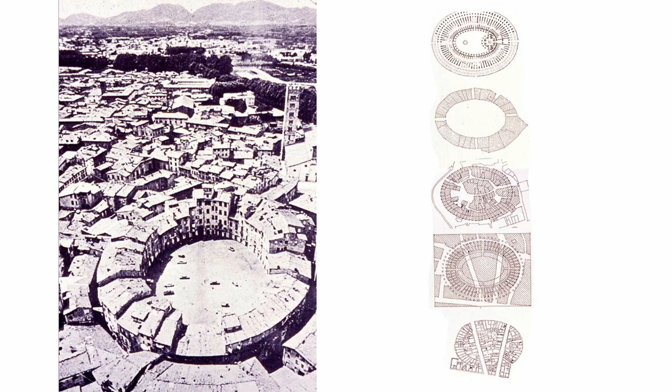But we've decided I wanted to call this building on the built. I guess that seems to resonate with the work that I set up the studio to do. As Balázs said, it was set up 25 years ago to focus specifically on altering existing buildings. My background is not architecture. I studied anthropology, and I found myself almost by accident in architecture, and I've always felt more comfortable working with existing buildings and changing them rather than starting with new buildings. And so it's that 25-year journey that we are on, and I'm going to show you a few projects that have marked the way along that.

I think the first thing I want to say is that if you think of buildings or villages or towns, they, to me, are more static than culture. The act of making them means that they are slow, they are expensive, and they are very intensive to build. And therefore, as a result of that, they're very massive, very heavy, very expensive to alter or remove. In contrast, if you think of culture as the beliefs or social norms or material traits of a group, culture is a living thing. Culture is restless. Culture constantly needs to be accommodated. It needs to find a space for its transaction, for its celebration, for its speculation.

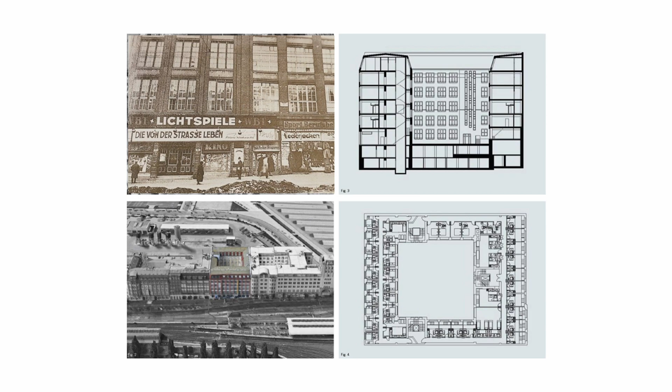It was built in the existing building. The building that we started with was built in 1921 as a cigarette factory.

This is a typology that, having had 2 hours in Budapest, I recognise will be very familiar to people in Hungary, but is quite alien to a London architect. It's a building typology which uses up the full width of the plot, building to the limits of the plot, and then creating courtyard spaces within the middle of it.

I always found it quite intriguing, because by building to the edge of the plot, it converts what you think of as only a front and back, where you get two sides of light, to one where you get six facades. So it's quite a beautiful discovery, the Hof, the courtyard building.

But this was the building that we were given. It had already been used as a hotel, and we were being asked to add new rooms to the upper levels of the existing hotel.

The character of the building was uninterrupted floor plates. Effectively it was a warehouse before, just single open floor plates. And to us, it felt like the form of it was rather like a kind of grand public house for the city.

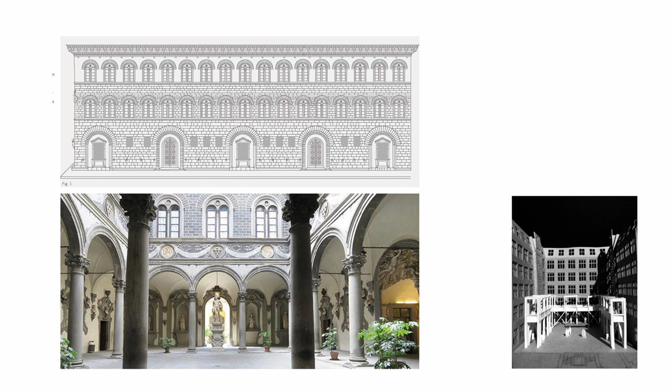When we're working with existing buildings, we find it very useful to think of what the building is trying to be, to understand what its prototype is. That helps us not worry about whether we like something or dislike something, which is a very unhelpful position to put yourself in. Liking is irrelevant, disliking is irrelevant. It's more interesting to try and understand something rather than decide whether you like it or dislike it.

If you think of the prototype of the grand public house in the city, it's a palazzo in Florence, a residence which contains both commercial and public functions. On the left is the Palazzo Medici Riccardi, a 15th century building in Florence. It is centered around a large courtyard, which acts as a kind of arrival space for anyone visiting that building. It acts as a focus to the whole building, and it's around that central space that all the rooms are arranged.

We felt that conceiving the idea of a hotel as a public palace might capture the sense in which the hotel has responsibility for the public life of Berlin. This is a little model we started to make of the courtyard as we were developing these early ideas for the project.

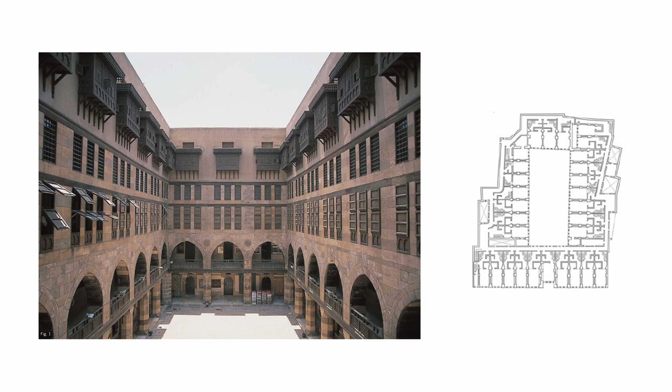Another reference for us, another prototype of this type of building, was the Wikala Caravanserai in Cairo, also built from the 1500s. This building was developed to accommodate visiting merchants to the city. It was a prototypical hotel, essentially arranged around an open courtyard, with accommodation for animals and storage at the ground levels, and rooms for guests as it went up higher.

We liked the almost theatrical quality of seeing through from one corner to another, seeing from one room to another, and being seen. The sense of voyeurism has quite a critical beauty in a courtyard building, and felt like it could be appropriate and interesting in a hotel context.

So, crashing from Cairo to Florence back to Berlin again, this is the actual building. We're out of the prototype and into the real building. You can see the large uninterrupted floor plan made possible by these rather beautiful curved beams that spanned from front to back, from side to side of the building.

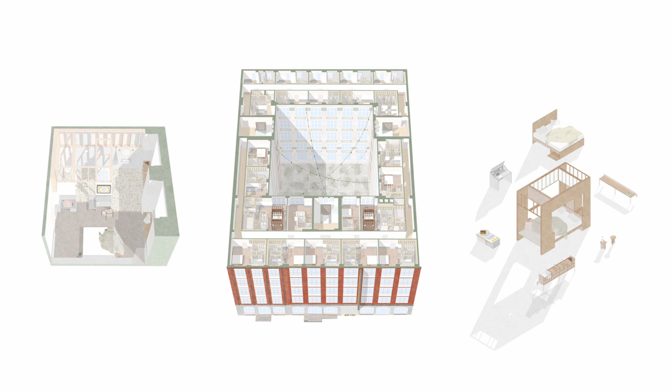So here are some drawings of the proposal. You can see we've started to divide the room up around that central courtyard, and we've started to occupy the courtyard with the activities that we think a public room should have. On the scale of the room, just about visible in this image, you'll see some proportions where we start to use the classic bottom, middle, and top.

In order to somehow allow this generous ceiling height to be occupied. And then at the top of those spaces, some perforated nature that allows your views through, or your apparent views through, so that you can still see the structure and the sense of open.

We make a lot of models in the studio, so these are 1 to 20, 1 to 25 cardboard and timber models, which allow us to test and develop the proposal. You can start to see in this proportioning system a language that maybe has come from that railway box, but perhaps feels industrial for the building.

Shutters and things like that mediate between the large windows and the room interior. So still making it as open plan as we could, maybe removing the conventional relationship between bedroom and bathroom that we have in a hotel to make the room as large as possible, but having screens and devices to subdivide it.

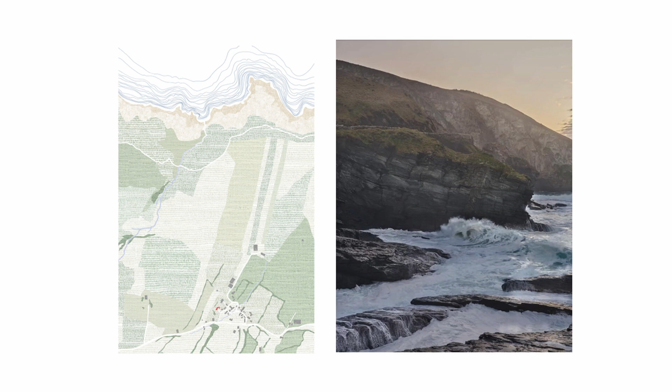So the next project I want to show you is a house in the west of England, in Cornwall, which is a district - it's the part of the UK that's furthest west. It's a kind of peninsula that goes out into the ocean. It gets the most amount of rain in the UK, and this landscape is the site for the building. The actual building is this little red dot here. That's the coast - the coastline is up here, so it's not on the coast, but it's very close to these quite dramatic cliffs and a dramatic coastline.

It gets very, very strong winds - all the trees are at one angle. This project is a restoration and an alteration of a house, a fisherman's house in that part of England.

But it was actually a project about trying to go backwards rather than go forwards. We often find that when a building comes to us, it's had lots of work done to it, which we are almost having to take away to find the building again. So with the first project there was nothing there, we started to build things, whereas this one we actually had to strip things away in order to find the original building.

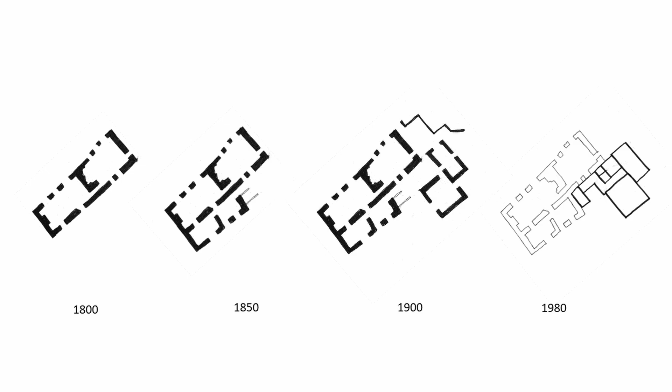So here is the evolution of the building over 200 years. It starts as a two-room building, very typical of buildings of this nature. Then it becomes a four-room building, then a four-room building with two outbuildings, and then those outbuildings all get meshed together, so it becomes a conglomerate.

I don't know if this is the case in Hungary, but it's certainly the case in the UK: old buildings don't have corridors. I think the corridor gets invented in the UK, about 1800 to 1850. It's not a good invention, I have to say, I'm not proud of it. But it gets invented in order for people to get from one room to another without interrupting a conversation. So it's the beginning of a sort of class system that arrives through the corridor.

And so you get this classical plan of room to room to room to room. The corridor arrives as a way to get from one room to another without interrupting the activities. And yeah, arguably it creates a whole lot more problems, because you end up getting rooms where no one goes. Anyway, that's a side effect. This building didn't have corridors, and many buildings of this age don't have corridors, so you can see you're walking from space to space to space like this.

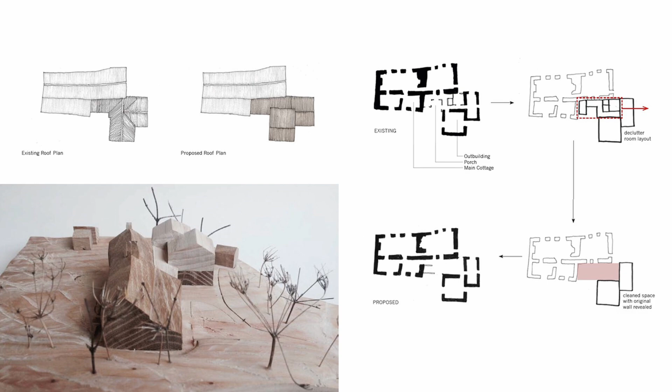I guess this is our sort of strategy for the proposal. We make more explicit the way in which the building has evolved, because that seemed to have just been concealed in modern plaster all over, so you didn't know what was old, you didn't know what was new — the whole thing was not legible.

So our proposal was to try and reconstruct this idea of the outbuildings and the house being separate structures, which had a... it's going to be interior, but it has a sense of a link between the old and the new. So we emphasize almost that you're passing from the original building to a new part. That was the strategy. And you can start to see in this model we start to suggest a different materiality between the old and the new, and in the proposals you'll see that a bit more.

This part of Cornwall has a very particular artistic tradition that emerges in the beginning of the 20th century. It's on the north coast of Cornwall, and it becomes a kind of artist enclave from about 1920, 1930. People escaping the city, looking for inspiration in the landscape — in the 1920s and 30s, Ben Nicholson, Alfred Wallis, a group of British modernists end up in this very remote part of Cornwall.

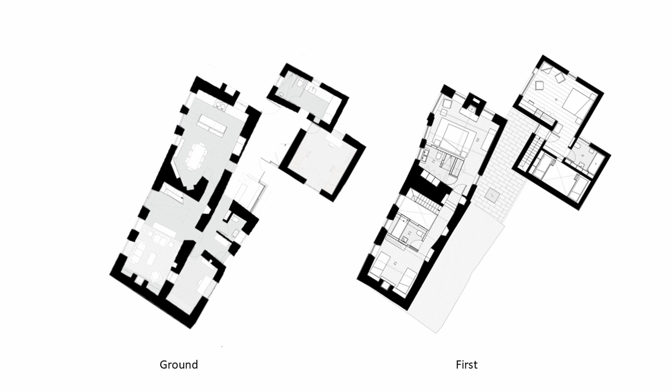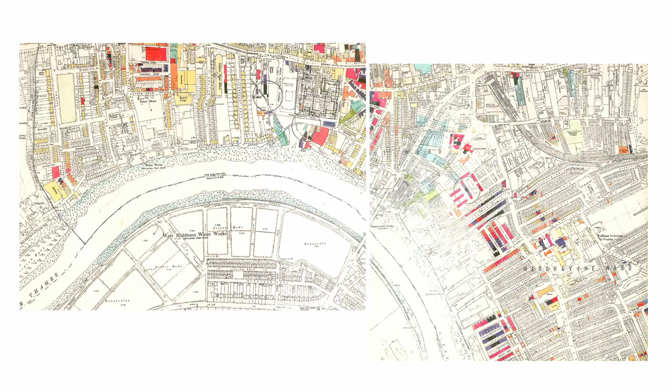There's a strange irony, maybe for all of us, that despite the intentions of our profession to change our cities, the biggest period of master planning in London, maybe in Budapest also, was by the Second World War—not by architects at all, but by a kind of imposition of bombing around the city. London's particular character of having social housing in spaces you'd never expect hasn't come through our own master planning, but through external master planning. It produces a beautiful character to the city, because it never becomes ghettoized, since it was randomly selected like that.

During the war, these extraordinary maps were made of London showing the destruction, each with a date of when something landed. The little black dots on the houses mark total destruction. Purple is where it was damaged beyond repair, like these ones here. Red is where it was seriously damaged but probably could be repaired. Orange is minor damage. We've got these atlases in our studio, and whenever you go to a site beforehand, it's a really interesting journey—you almost know what you're going to see just from the street, through this bombing map of the 5 years of the war in London.

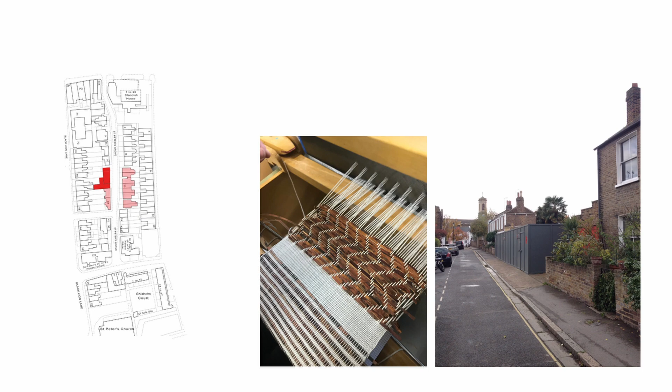So that's our site. That is literally the site from one end, from the garage of our neighbour to the next house. You could imagine 3 houses would have sat in that space.

I don't know why I put that picture of weaving in there. I can't remember, but anyway, it's a nice picture of weaving.

I suppose what I was talking about is this idea of rhythm in a way. It's like you need the bass, and then you need a kind of tune over the top of it. The tune can change as long as there's a rhythm that goes with it. That's something we wanted to work with in terms of how we were going to divide up this quite long plot.

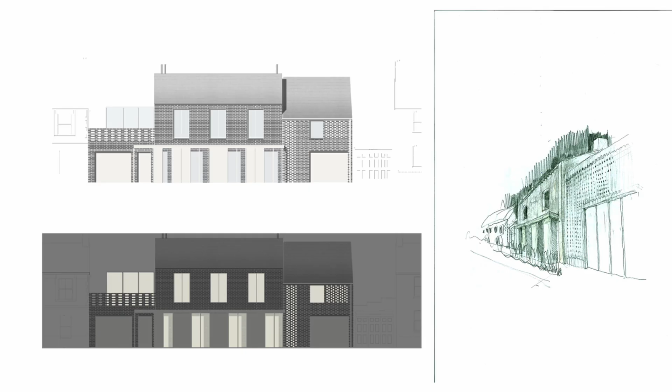Some drawings of the building. You can see now we're starting to divide it into these 3 sections. We like the fact that they are both one character and different characters, so they're connected but disconnected.

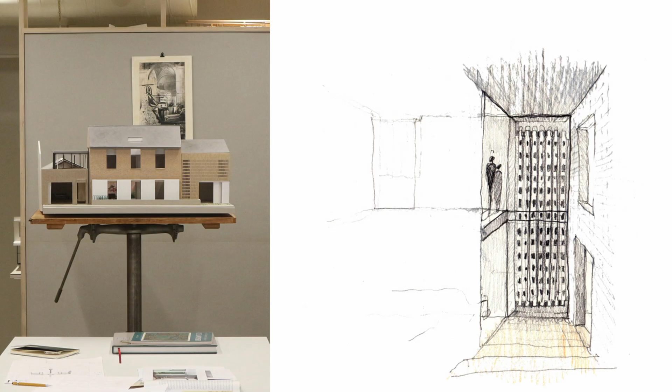Some sketches of how that might materialize. Again, we build a lot of models in our studio - I was talking to Martin about model making, it's a really important part of our process to test things with models. This is a 1 to 20 or so model in our studio, studying the relationship between these 3 buildings as 3 and 1 at the same time.

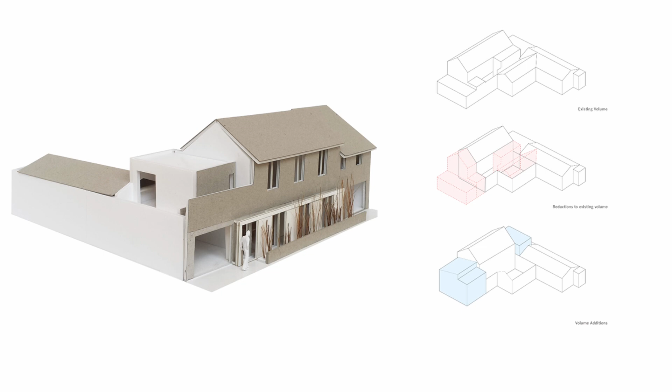Some sketches of what that interior might be, and volume studies of how those 3 become 1, different characters complementing one another, both independent and connected.

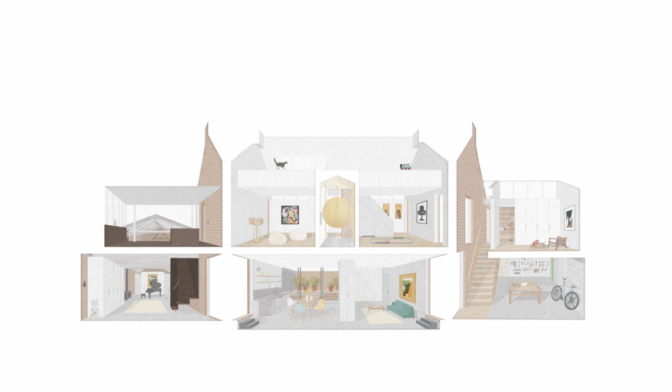We've obviously been talking about this from the outside. This strategy of 3 buildings and 1 building at the same time was also very interesting to think about from the inside. It just gave us the opportunity for different spaces of different characters.

A space that's more like a barn, a space that's more like a long gallery, a space that's more like a lounge, a space even that's more like a chapel or a library. So almost like a compendium or a collage of different spaces and proportions within the existing building.

And to enjoy making a point, to make you aware when you're stepping from one building to another, we changed the level from one building to another - partly because we can then get an attic at the top, but also so that you feel like you have that experience almost like a thief breaking into a building, breaking through the party wall from one space to another, as an opportunity that this long plan gave us.

Spaces, different characters, different materials, the step from one to another, that change in level from one to another.

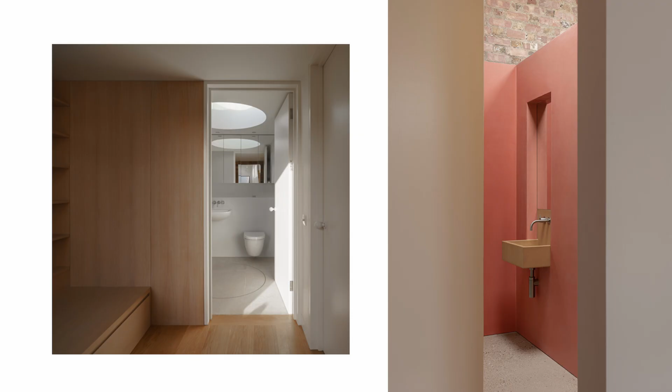And just creating different spaces of different scales for different activities for the people who live there. The bathrooms and the use of exposed brickwork to emphasize some spaces feel more external than internal. And then how this new building at the back interlocked with the neighbours' walls that are around it.

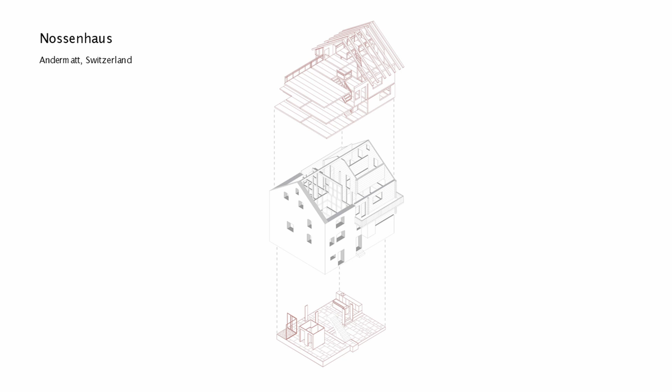Okay, the next project, we're jumping into Switzerland, and this is an old building built in the 1620s. This is a project about restoration and adaptation, taking an old building and making a new vernacular for it.

So it's about finding that building again - elements that were new and proudly new, and elements that were new but looked like they might have always been there. So some of the work we do is intended to be very obvious, and other times it's meant to be quieter, more discreet.

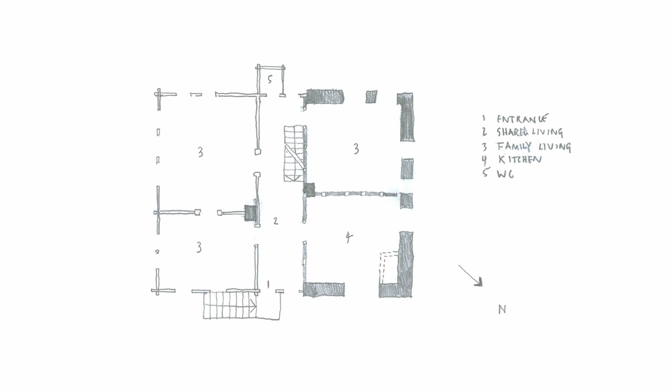So this is the typical plan, could be all the floors. This house would have originally been for 3 families - each family would have had a room. That would have been one family, that another, that another, and they'd have cooked together in this space. It doesn't happen like this anymore in Switzerland, but it did - this was 400 years ago.

And then they had these unusually wide corridors that were social spaces - about 2.5 meters wide, disproportionate to the rooms off it. It was interesting that in this space the 3 families would socialize, gather and meet. It would also be where the fires for the house would be - you'd light the fire from this side, and then ovens would sit within the room and keep it clean. So there was a separation of fire from heat - quite an interesting plan form in these old Swiss buildings.

Half the building was stone, half was timber. You can see where the timber is built like that, and the stone building is obviously much thicker in its wall construction. In this part of Switzerland, the stone faced the wind, which came from the north - the cold wind - so they'd put the stone side there. The warm side would face the sun in the timber, and that would heat up more. So there's this language of timber and stone, particular to this part of Switzerland, and they'd put the kitchen in the stone bit because it wouldn't burn down so easily.

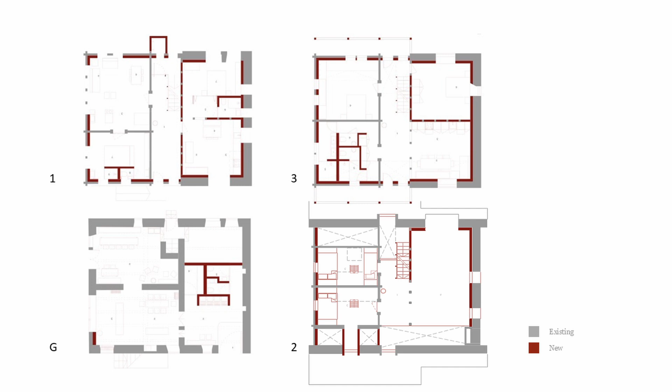This project came to us because they wanted to take this house and make it into a wine bar, 2 or 3 apartments - so a multi-family, mixed-use building. And as you all know, that starts to bring quite a lot of complications about acoustic separation and fire separation, because you've got people living above people partying, and you need a certain technical component to that.

So this becomes our strategy for insulating the building. All the red is new, everything grey is existing. In the stone bit we're insulating on the inside, and in the timber bit we're also insulating on the inside. This allows us to see the timber on the outside of the building, which was very beautiful, and to plaster this - so it starts to develop a language for how the new building will look.

We were particularly interested in the corridor space because it was the connection between the timber and the stone part, and it had a character that we wanted to celebrate. It was a space that we wanted to be a focus to the building.

We had to take the whole building apart because of the old and new elements, and then we're left with this almost Jenga-like timber structure, from which we're able to build back. So in this project, everything new we made new. Within the interior it was clearly legible where the new structure was - where we had one piece of timber that was good, we would keep it; where there were two that needed to be new, it becomes a splicing of old and new - repairs that were almost made by 4 generations of different carpenters.

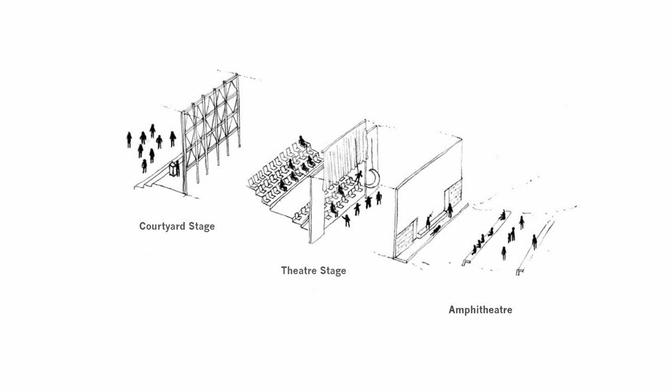We thought that when we made the competition, our response was: if you're going to build a theatre, and you're true to this idea of what you believe theatre is, let's make this one building have many stages and many uses. A theatre shouldn't just be the nice curtains and things. It can also be outside, it can be just a bench on the side of the building. A theatre can have many different configurations if you think broadly about what theatre produces for society.

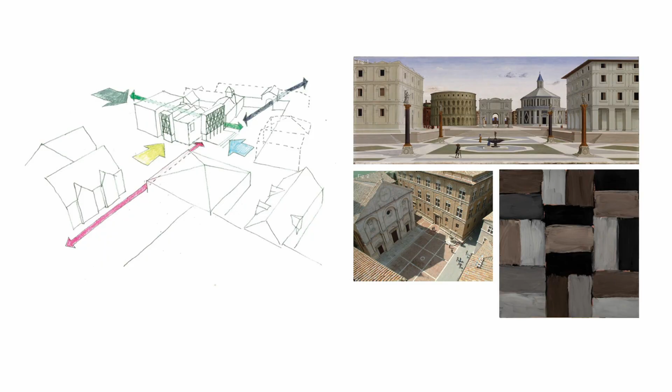In the early development, we were inspired by the Italian city. It's difficult not to think of these buildings in these ideal places as having civic responsibility, both the buildings themselves with their uses, but also the spaces between them. Look at this, this is Pienza. This sequence of spaces has got the most perfect proportion that somehow draws you in and invites you to take your role as a member of the city responsibly.

And we wanted this new building to draw you in that way, to create a front, to make axes between the old buildings and the new ones so that you see from one to another, to act as a piece of the city fabric. This is a fantastic Irish painter that I like a lot, called Sean Scully, who makes three paintings and then puts them together, and the collage makes a new whole. I think it was helpful for us in terms of thinking about how this building would stitch the city together, stitch the school together.

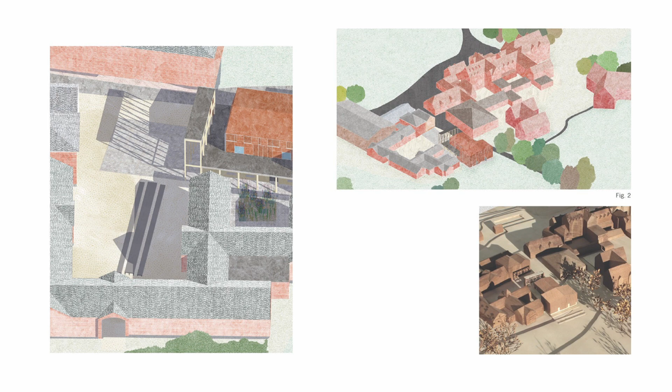Some drawings of the theatre in its location, in a model and in a drawing here. You can see we gave the building on the right, the school on the right, one geometry. The school sheds on the right had a different geometry. We gave our theatre the geometry of the ones on the right, and it helped knit things together and made these interesting spaces around it and between it. This is it here with its new piazza or square, and then facing south, the back of the theatre could become this arena or amphitheatre for bigger events.

We had never done a theatre before, and we suddenly realised as we were building this model that a theatre is a massive box, and it doesn't have many windows in it, and it quite quickly becomes a shed. We were stressed and worried about this massive box in this quite small school.

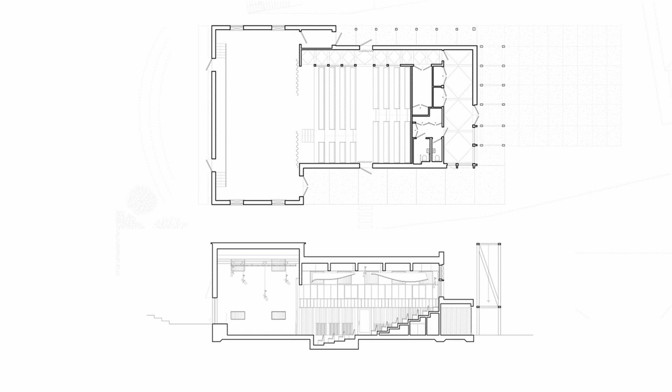The plan, our portico at the front - let me say again, okay: every theatre has two doors, doesn't it? It has a main door, that's the one you dress up and go in and get excited about. It also has the back door, where it's important to have these roles - you don't want everyone coming in. The kids have got to learn what it feels like to go in the stage door. So we need to make the front have that sort of dignity of how special it is for the performance.

But then when this is being used for an assembly, then perhaps you can just use these side doors. It can be a classroom on some days, but it can be an important space on other days. And you can start to see the kind of subdivision of the building in section.

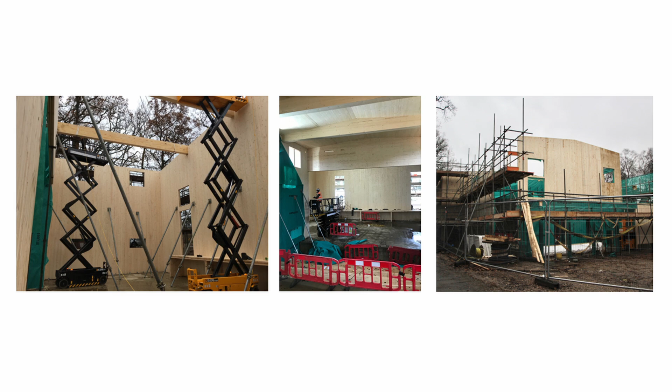The teacher was always saying parents always arrive for these performances late, though some of them arrive very early. But the ones who arrived late, they needed like a gallery, like a minstrel's gallery, to be able to see their child on the stage and be there. So just using these devices from medieval theatre, where the theatre is a building in the round rather than just the formal raking and seating, but also being able to get a pupil in a wheelchair on one level. So we need to make it accessible, but at the same time have the hierarchy that we think is important in theatres. We made it from cross-laminated timber.

It was good because it was going to be very quick to assemble, rapid, made in this very short period in the school holidays. We know it's good for carbon, just to lock the carbon into a timber structure.

But the problem with CLT, cross-laminated timber, is it's so perfect. It just stops you having to think, because you can just get this piece and cut a hole in it. There's your window, there's your door, and it almost hijacks you from any design decisions. Whereas if you're building in bricks, you have to think about things like what the lintel will be like. This looks dumb, so we had to invent ways in which we could interact with this material.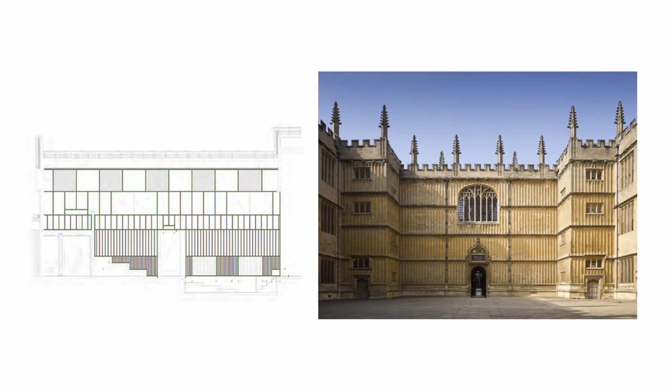This is a library, an old library in Oxford, from the 1620s or so, all made out of stone, and it helped us enormously for how we would subdivide this big material by laying things on top of it. In the UK, a lot of people make CLT buildings and then cover it up, and in a way it's a beautiful material, so we thought if we put things on top of it you would still see it, but it would start to have something of the beauty of the proportions of this Bodleian library.

And this is us subdividing it, low level, medium level, and high level, in this rhythm of timber framing that goes on the surface of it.

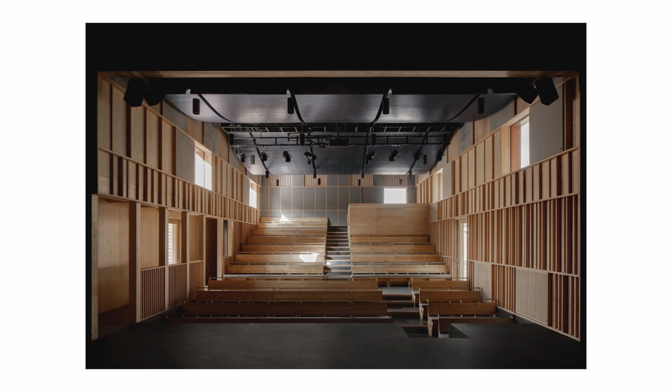So this is the interior of the building. The CLT is still there, it's just these big pieces, but it's got small timber battens laid on top, which is very good for acoustics, but also helps break it from being this box.

I mentioned it was good for it to be a theatre and a classroom, so we put windows in it, and then those windows have shutters that you can close when it's in theatre mode. Very manual, so the pupils can do it themselves. It's not all buttons, and we wanted it to be a place that pupils can learn about building and feel like they can interact with, like you don't have to press a button to open anything.

And some images of the inside. You get these really beautiful views of the forest through here, and I often think if you're bored in the theatre or classroom, you've still got something else to look at. So I think trying to engage the pupils in a way that isn't just about the monodirection of learning.

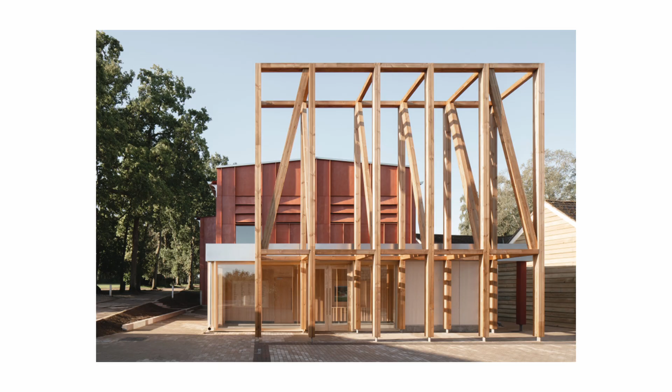A view of the front, this portico. The idea is that this is an entrance, but on days when they have a performance, they can make a poster and bring it up, and it can announce the event. So it's a ceremonial structure as well as an entrance.